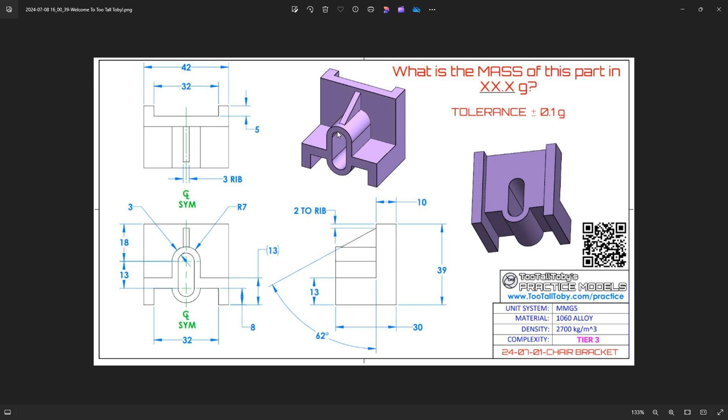So we'll build that as our base rectangle, then we'll make a cutout, and then we'll add our slot and our rib. So let's go ahead and hop over into IronCAD and show you how this is done. So we'll start again with an extrude inside of here, and we'll just set the depth on this to be 30. And our width on this guy is 42, and our height is 39 for this model. So a very simple way to start off with the overall dimensions,

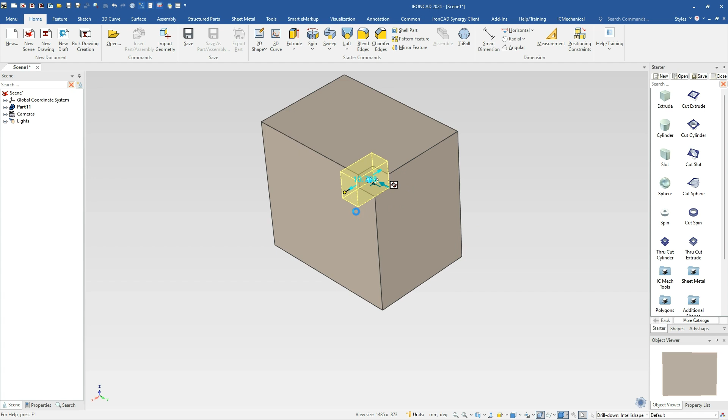and then we can drag and drop a cut extrude here on this front corner point. And I'm just going to use my handles to snap to these edges here. So you can see I'm grabbing this top handle, holding my shift key to snap that, and I can pull this all the way back to the back point. And we know that distance there is an offset of 10, so we can just take the overall value, move our cursor over, minus 10 for that.

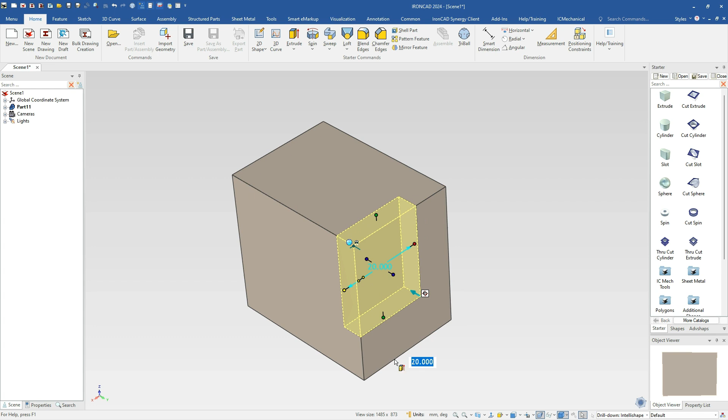And we'll do the same to the bottom. So the bottom has an offset of 13, so we'll just snap to the bottom, move it over, minus 13, and we'll get that value, and we can just simply pull that through to the other side. So that gives us our initial cut operation for this model.

Next, we want to go ahead and add our cut on the bottom here, so we'll do an extrude cut down here, and we'll just place that, and we'll grab this bottom handle here. If you see now, I grab this bottom handle, I'm going to snap to the bottom, because we know the height of that cut is 8, and we know the width of this is 32. Yeah, 32 for that, so we'll go ahead and set that as well.

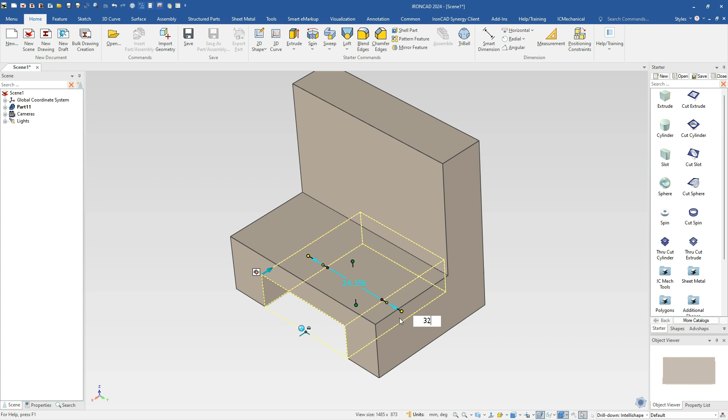And then we'll drop on a slot feature, and I'm going to drop it right here on this center point. And notice if I'm facing this orientation where this is most of the area that I see, it extrudes up. If I rotate a tad bit there, if I drop on a point, it'll use the most face area that you see. So now when I drop this, it'll actually come towards me. So that's what I want in this case.

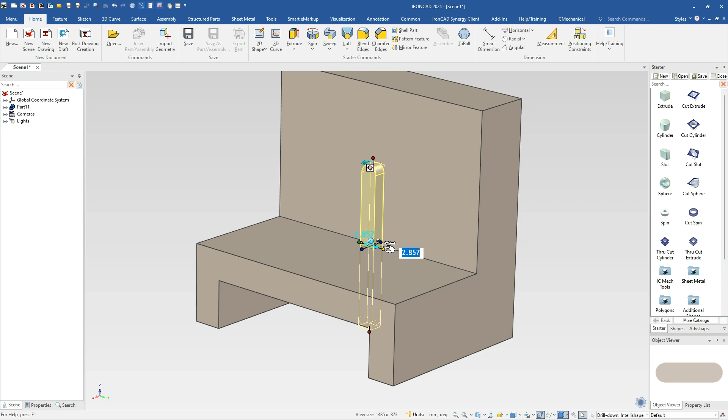And we know the height of this slot is 13 to centers plus the radius of 7, so plus 14 on that to give that side. And then our width on this is going to be the 14 for that. So now we can position this inside of here.

I'm just going to use the TriBall, and I'm going to hit the space bar, move it up to this top arc, holding the shift key down. And I know from the center point, the top distance from here is actually set to 18. So I'm going to move it to there, and then I can just pull this handle all the way out to the front side. Now we had to do the inner hole.

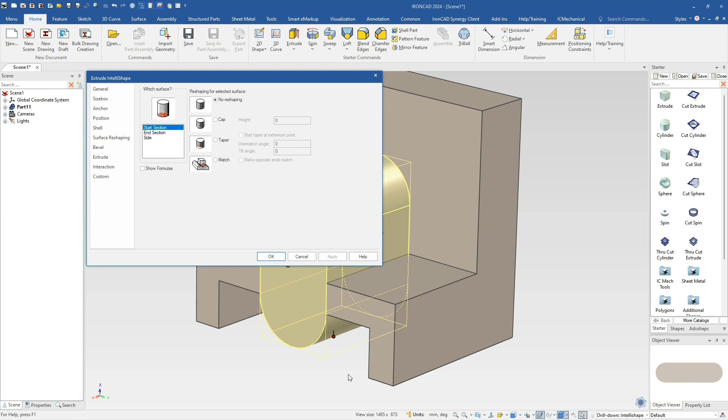We can actually add another cut slot onto this, or we can actually just go into the IntelliShape surface reshaping, and we can add a shell to this, and we know the thickness on that is 3mm, and hit apply to do that.

Now one thing we notice is that it doesn't go all the way through the part because it's only on this feature. So to get it to go through all that geometry, just grab your original cylinder, grab that back handle and snap it back to the back edge. Now that it's there, it'll cut through all that geometry. So a very easy way to do that and get that cylinder all the way to the back side as well.

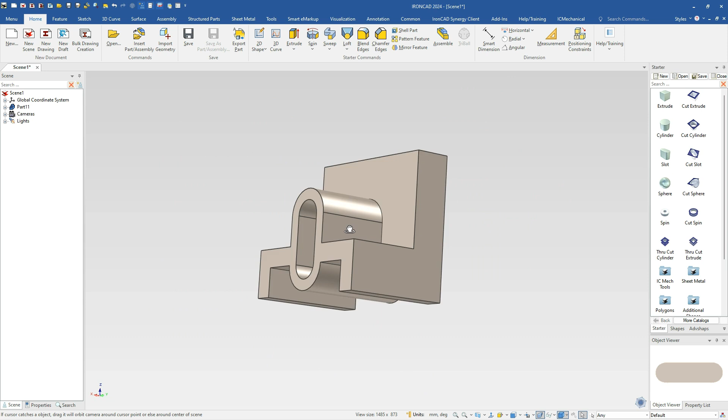Next, we'll go ahead and add our rib feature here. So we'll go to our shapes catalog, drag and drop the rib right onto the center point inside of there. And we can pull this up a little bit and move these handles around here to some values. So we can just put it somewhere along in here and move this out.

So all we know is this angle from here, and we know the height of this is just 2mm from the top. So we'll just take this handle, move it up to the top, subtract 2mm from that to give us our location. And we also know the width of this is going to be, let me double check, 3mm. So we'll just go ahead and select that.

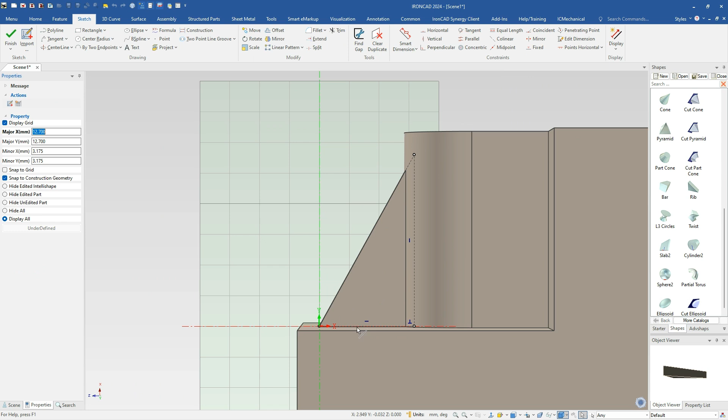That's a 3mm there. Now we can edit the cross section of this by right clicking on that, and we have our cross section. What I'm going to do is fix this bottom line here because we don't want that to move. And then we just put an angle constraint here, which has a value of 62. The other angle doesn't really matter because we just need to make sure that it's inside this geometry, so we'll just leave it like that and go ahead and extrude that out.

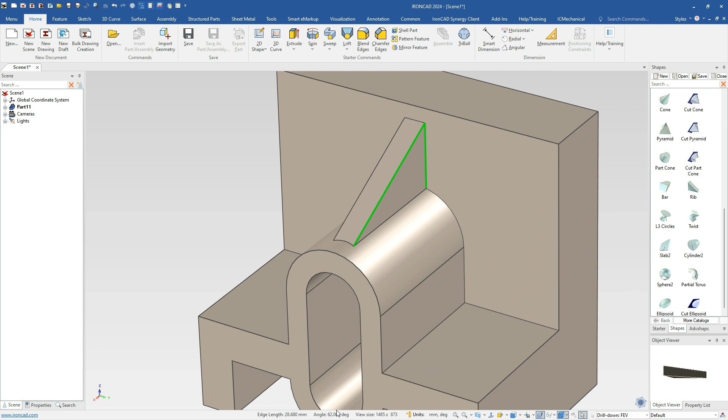So that gives us our rib feature. Again, if we want to see that angle, we can select those two edges to verify down here at the bottom of our status bar. 62 degrees is that angle. So that's what we wanted for that shape.

And now all we need to do is go back to our starter catalog, drag and drop our extrude cut on that top point. And again, we can just align the depth of this to the back here. We know the depth of this is 5mm, and we know the width of this is 32.

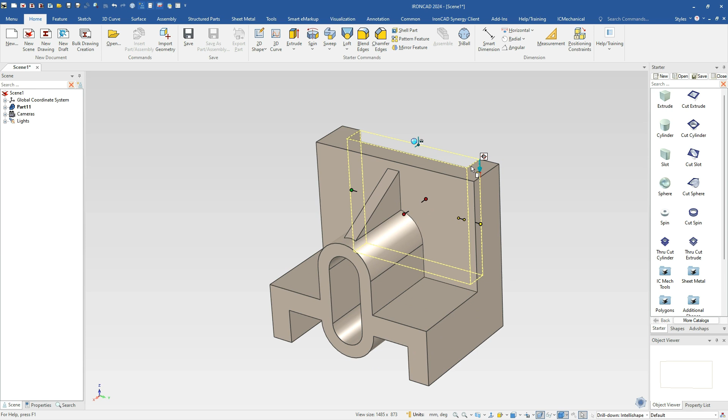So we can right click and pull that and actually just snap to this point because this one's 32 as well. This one is actually 32 as well if we look at that value. It's just referencing the opposite point, so you can see that value is 32 as well. So that's how you can build this model, fairly easy inside of here.

If we go over to our properties, it has a mass density of 2700. If we tab out of there, that should give us a mass of 45.193. So there you go. That's how you can build this model in IronCAD, fairly easy to do. You can use Smart Paint to color that if you like.